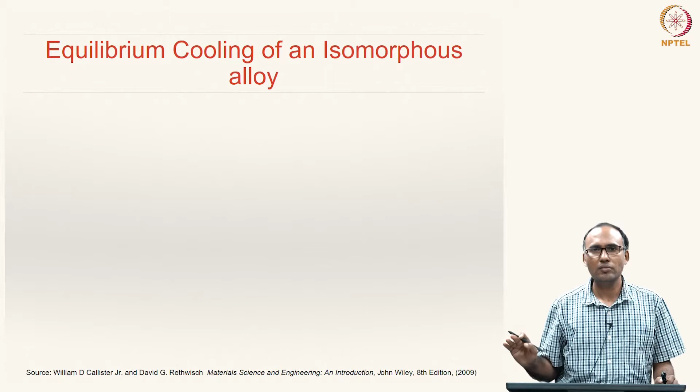All right. So, now let us look at the equilibrium cooling of an isomorphous alloy. What do we mean by equilibrium cooling? When we are cooling down an alloy from a liquid state to solid state, we are giving sufficient time for the process to follow the equilibrium path. So, that means you are cooling down at a very slow rate.

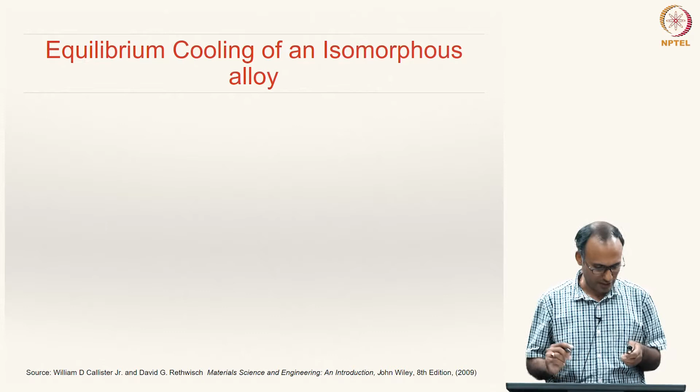From the practical perspective this may not be feasible, but studying the equilibrium cooling of an isomorphous alloy is an interesting thing, so that we can understand how the microstructures evolve, and then, compared to such an idealistic equilibrium cooling, what happens in a realistic scenario is also something that we will look at.

So, now let us look at this system. Here we are looking at an alloy of 35% nickel, which is in liquid solution at point A, and we are trying to cool it down. Until it reaches point B, just above point B it is liquid solution. On this line you start having the two phase region. When you are reaching point B, small nuclei of solid solution start forming.

You can see these are all small nuclei of solid forming, and you are already in the two phase region now. Since you are in the two phase region, you should draw a tie line and say what are the compositions of the liquid and solid phase. Because you are at the very beginning, the liquid composition will be almost the same as the original composition, that is 35% nickel.

But from the tie line, whatever initial solid is formed is very rich in nickel. That is 46% nickel; if you draw a vertical line, that corresponds to 46% nickel. So, you enter the two phase region, and if you further cool it down, what happens? Let us look at point C. You are still in the two phase region, and this tie line is drawn.

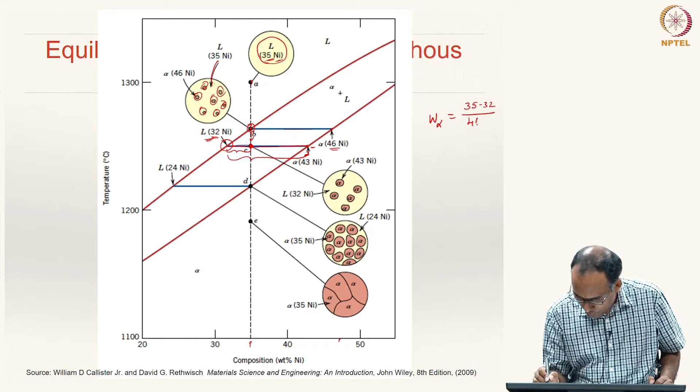Now, you know the liquid composition and the solid composition. What happens to the weight fraction of solid and liquid? The weight fraction of alpha will be this distance divided by this total distance. Here 32 and here you have 35, so that will be 35 minus 32 divided by 46 minus 32. So, that is 3 divided by 14, the weight fraction of alpha.

And now the weight fraction of liquid. No, it is not 46, sorry, it is 43. Weight fraction of liquid will be this distance: 43 minus 35 divided by 43 minus 32. 43 minus 35 is 8, and 43 minus 32 is 11. So it is 8 by 11, and alpha is 3 by 11, not 3 by 14, I am sorry.

We should always have W L plus W alpha equal to 1: 3 by 11 plus 8 by 11 equals 1. So, it is working. This is 3 by 11, this is 8 by 11, those are the weight fractions. Now if you look at position B, the distance from the fulcrum point to the liquidus is 0.

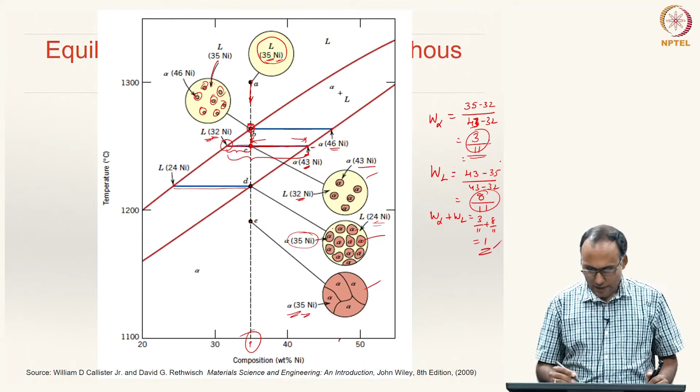So, you have a liquid state and when you are cooling it down gradually, you are forming the grains of alpha, and it is possible that several nuclei might form within the liquid and each one of them grow independently until they meet each other and then form final grains like this. All right.

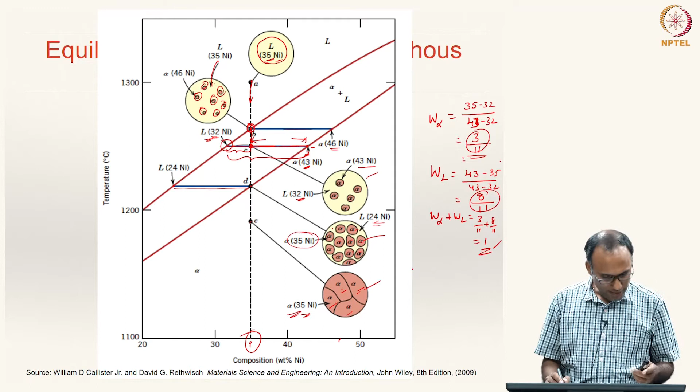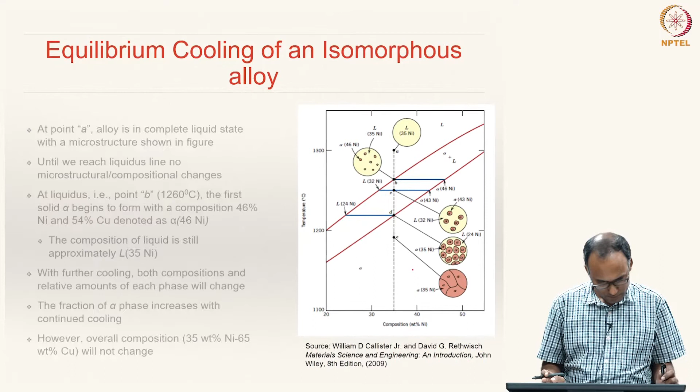So, we have discussed that alloy completely. Now, let us look at what happens when we do this cooling in a non-equilibrium manner. What is the meaning of that?

Please understand one important point here, when we are talking about being just above D in terms of temperature. So, just in the two phase region you have some alpha and some liquid, right, but then just below that, not only up to E, even here the microstructure will be same. As you are coming down, the microstructure does not change, all that changes is the temperature of the solid; the microstructure will be same even just below this.

Okay. So, does that mean that from this state to this state it changes all of a sudden? No, there is a sufficiently long amount of time that is spent in order for the system to go from this state to this state. We are simply not showing the time in this phase diagram, there is no time in this phase diagram, right. So, from just above D to just below D, it could be several hours, which is not being shown in this phase diagram. So, when we say that we are just above D, we are looking at a time at which the equilibrium state is reached. So, this is an equilibrium configuration.

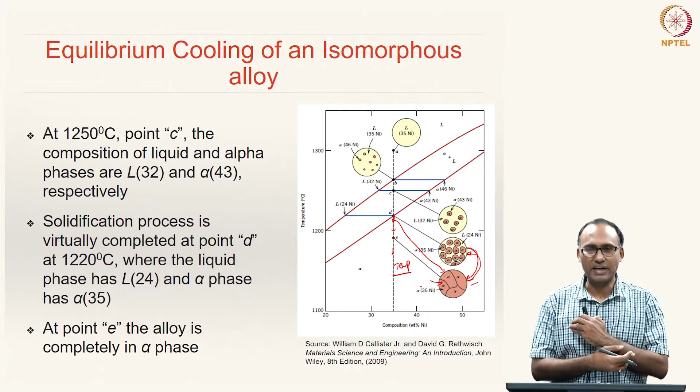All right, and when we are drawing these microstructures, the assumption is that the cooling is done in an equilibrium manner, meaning we have done the cooling at a sufficiently slow rate. That means the cooling rate is very, very low. Okay. So, what happens if you do non-equilibrium cooling? That means your cooling rate is not as slow as what we have shown here, so the systems did not reach their equilibrium configuration. If the cooling rate is high, the systems do not reach their equilibrium configuration.

and here what we are assuming is that in the liquid state the equilibrium exists, and only in the solid state there is no equilibrium. The cooling is done in a non-equilibrium manner only in the solid state, but not in the liquid state. That is a reasonable assumption, because in the liquid state you are at very high temperature, right.

So, the assumption that the equilibrium exists in the liquid state is a reasonable one, but in the solid state you need sufficiently long time for solid state diffusion to take place. So, it is a time dependent process, and hence cooling rapidly is going to change certain things when we are looking at solidification in the solid regime, and hence there is no change in the liquidus line, whereas the non-equilibrium cooling solidus line is represented by this dashed line.

So, now the microstructure should evolve according to this. All right, now let us look at what happens. Now, we have the same 35% nickel alloy. When we are cooling down up to point B, nothing changes because the liquidus line did not change, and again same small nuclei of solid alpha form, and the composition of alpha will be about 46% and composition of liquid will still remain 35%.

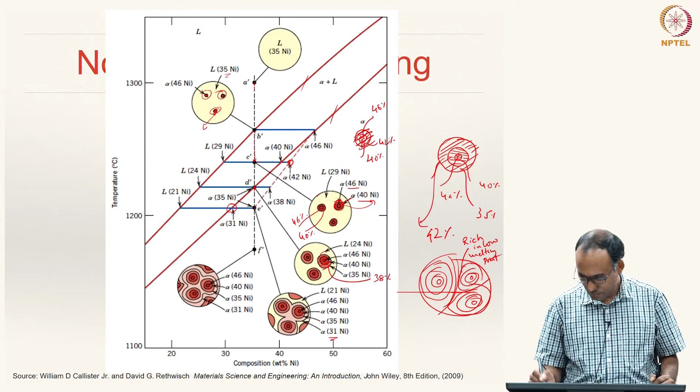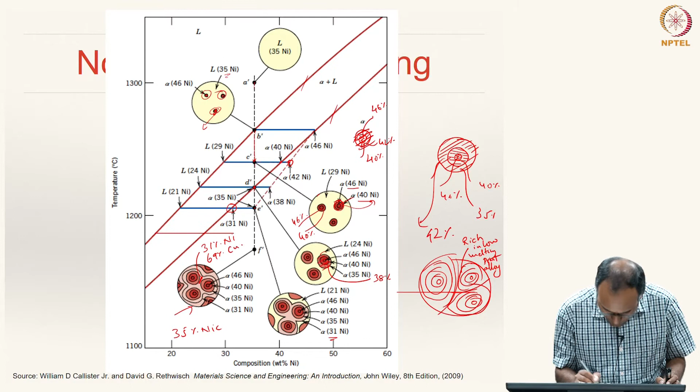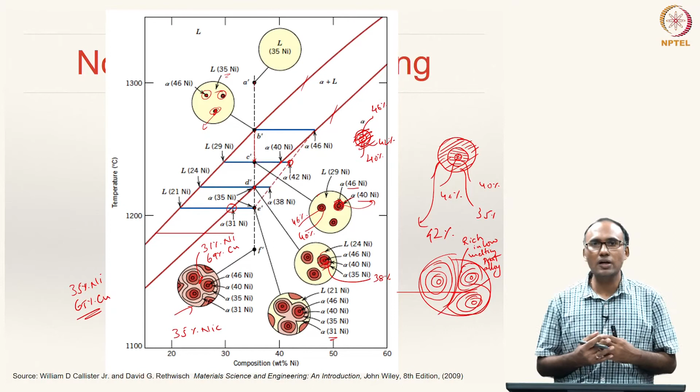So, here you see normally this should have been 35% nickel. On an average it will still be 35% nickel, but in here you also have regions of alpha, particularly this one, which has 31% nickel. 31% nickel means 69% copper, as opposed to 35% nickel, 65% copper. That means you have the low melting alloy getting segregated near the boundary between two particles. So, such a cored structure is an outcome of non-equilibrium cooling.

So, this process is called segregation, which means that you have a higher concentration of low melting element increasing from the center of the particle to the grain boundary, the boundary where two grains meet, and such a structure is called cored structure, and this cored structure gives rise to inferior mechanical properties.

Why? Because if you are heating a casting made out of such a cored structure, the grain boundaries, because they are rich in low melting alloy, might actually melt first. So, if you imagine using this component at high temperatures, the grain boundaries will melt. As a result, the material might actually fail. So, the grain boundary region melts first, which is richer in low melting element, and that can be detrimental for actual service conditions.

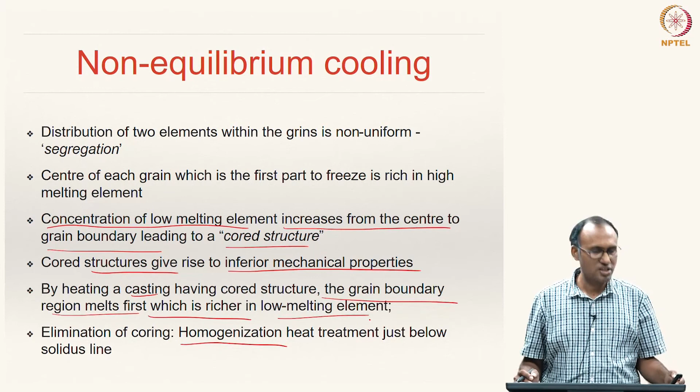So, you need to do something about it. However, in reality we cannot do equilibrium cooling, so many times we will only do non-equilibrium cooling, but since we know that we will have this kind of cored structures, you need to do something to eliminate this coring. So, typically at the end of the solidification process, all the alloys are subjected to certain kinds of heat treatments. Here a homogenization type heat treatment has to be done in order to eliminate these cored structures.

All right. So, with that we will stop here, and then we will look at some variations of type 1 alloys and type 2 alloys in the next class.